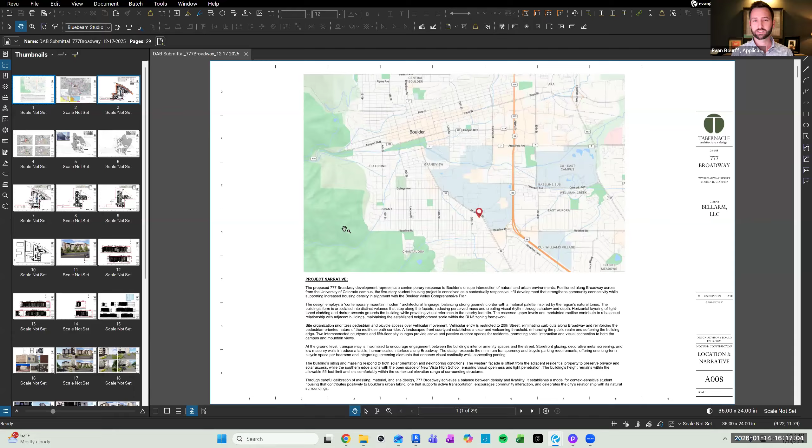Good evening, my name is Evan Bourff, I'm with Tabernacle Architecture and Design, the architect for this project. I appreciate everyone's time and the opportunity to present. I believe everyone's had the opportunity to review the packet and some of the materials, so I won't go word for word here, but what I want to walk through are the design philosophies and some of the site constraints that led us to where we are today.

Located at 777 Broadway, this is the location of the Horizons International Building. It's a student housing specific development, which is important to highlight as we look at the location and the design philosophy of the project. We're looking at 218 beds across 61 units, and the project site is just over 1.25 acres.

The project, located here at item 1, is adjacent to existing multifamily and student housing. But really the most important adjacency for us is being across from the University of Colorado Boulder, highlighting the pedestrian orientation for the project.

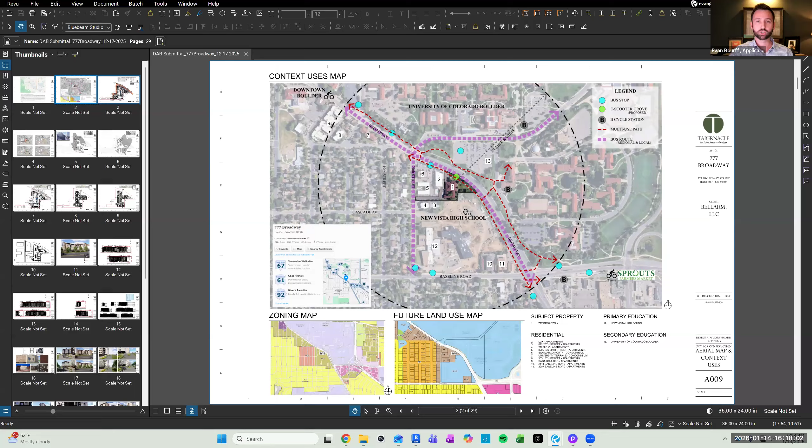As we look at the site plan, I'll get to this next exhibit in just a moment, but wanted to call out some site constraints that are more challenging to see in the 2D diagrams, first and foremost the topography. The site has about a 9.5 or 10-foot grade from our neighbor to the west down to this low point, which will dictate our building height.

In addition, there's current vehicular access located at Broadway as well as 20th Street. With the new proposed design, we're looking at shutting down our access to Broadway and forcing residents to use 20th Street.

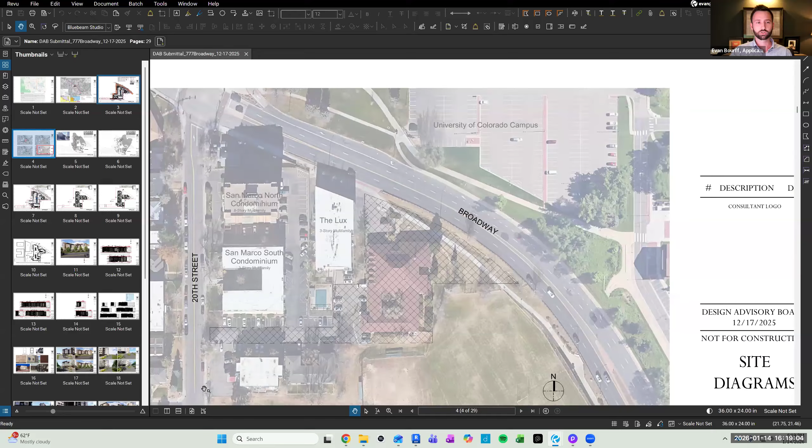Which will allow them to come out to the two signalized locations at Broadway. We're really trying to focus on a pedestrian and student-oriented development. We have a unique location on a multimodal route, Broadway, but also the multi-use path for pedestrian and bike traffic, and we're located near the tunnel that gets residents under Broadway and across the campus.

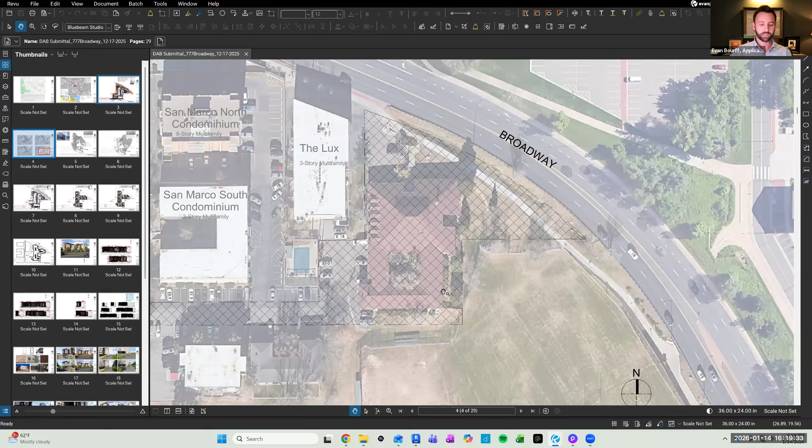So looking at the existing conditions and starting to layer in some of the site constraints that led us to the mass and the building form, we're required to maintain this 25-foot shared utility easement.

Currently that bifurcates the site in two, so we can't build on top of it and have to relocate it. We looked at two options: running it to the location it is now, or along the southern property line adjacent to the New Vista High School site.

We chose this layout because we're seeking to close off the vehicular access and reroute our traffic to 20th Street. The Lux will still have vehicular access at their drive aisle, so their site will not be impacted.

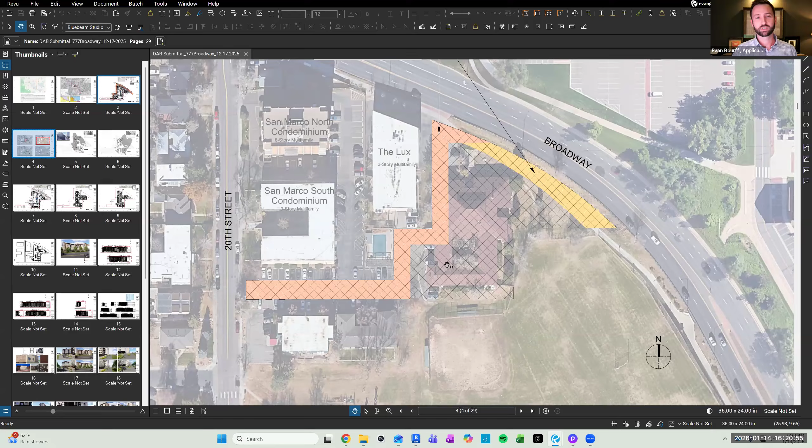But locating the shared utility easement at this location allows us to push our building further east and away from our neighbor at the Lux, which helps create visual separation, but also helps on the shadow analysis and solar access for the Lux, as well as getting our building further down on the low point of the site to bring the perceived building height down.

The other easement shown here in yellow is the multi-use path. So we're starting to layer in additional easements, including the fire apparatus T-turn with the drive aisle removed from Broadway.

We worked with fire, and they'll have to readdress and reroute fire response to 20th Street, so it was important that the fire apparatus was located at that location. As such, you'll see with the building design that egress points and vertical access for fire are located at these locations as well, further helping to define where programs should be situated on site.

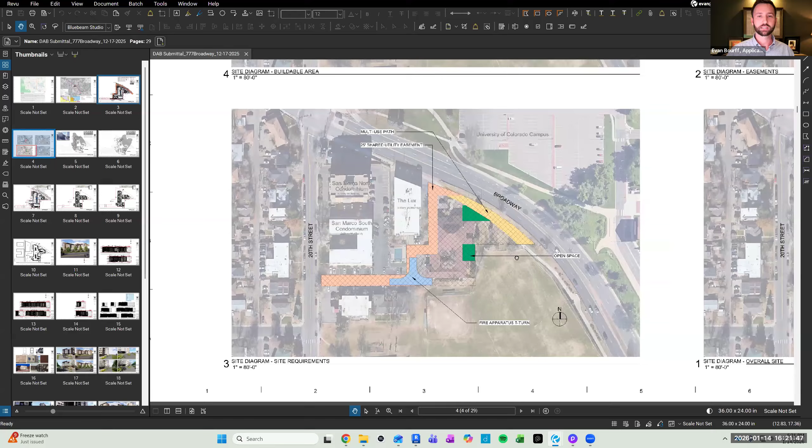Lastly, we have open space layered into the site plan, which gives way to the resulting form and mass that we'll dig into a little more.

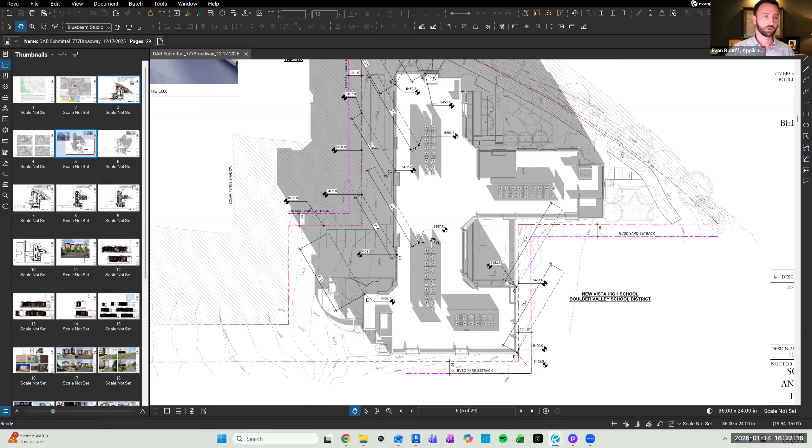With this solar analysis, I'll touch on these briefly. There's one area we'll seek an exemption on, to the east, the open field at New Vista High School, as you may recall from the previous plan. Because of that easement location, we're able to push our building away from the Lux, so we do not need to seek any exceptions with them, and we are not encroaching on the solar fence.

I'm going to cruise through some of the floor plans. Tonight we're really looking forward to getting feedback on about five main criteria within the application, or Appendix B, which I'll reference in just a moment. I think we have one bonus item we wanted feedback on as well. Follow along with me if you have those exhibits pulled up.

The first one I wanted to touch on, sharing not just the 2D plans but some 3D images, is Appendix B, page 4 — if you've got the DAB packet downloaded, that's page 12 of 60 of that document. This one is the landscaping and screening requirement.

Our staff comment was that the criteria is partially satisfied, and we're looking specifically at a decorative metal panel located at the rear of our property.

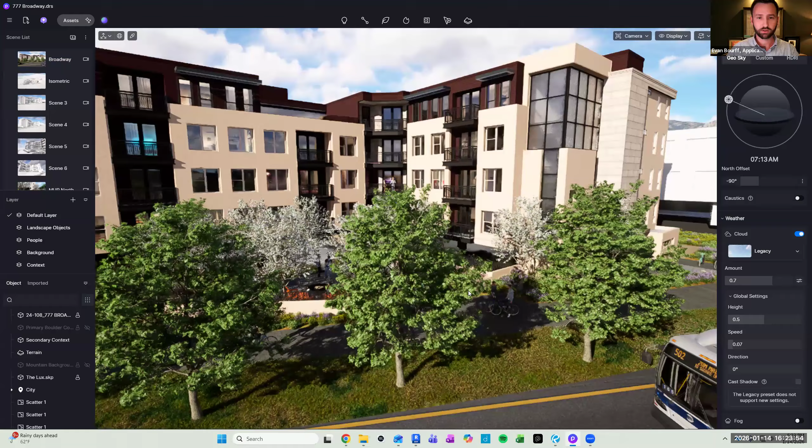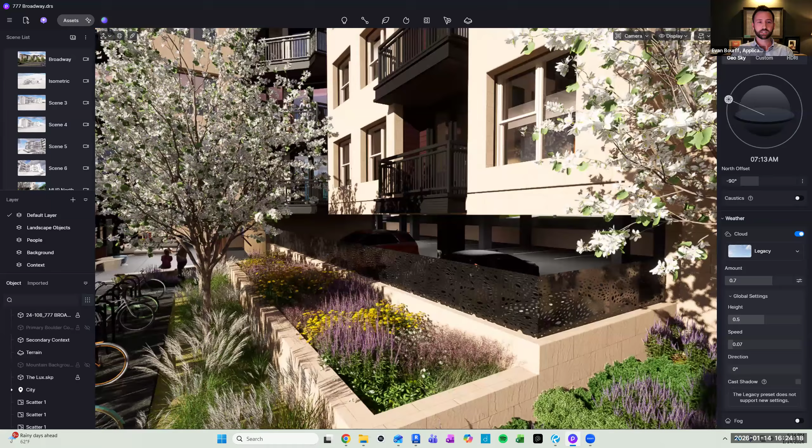As I navigate — hopefully this works okay over Zoom, let me know if I need to slow down — we're employing a knee wall design that meets the required screening height, and in addition we're looking to add a decorative metal panel screening to further enhance the pedestrian experience, both inside and outside the property.

So this comment on Appendix page 4, the landscaping requirement, touches on additional metal screening where we previously were not showing it. This is the previous design, which is what was reviewed to get to today's version.

This knee wall, while it meets the required screening height, staff recommended that we extend the metal panel around this corner, and I think we're in agreement. I think that would look good, so we're going to plan to make those changes.

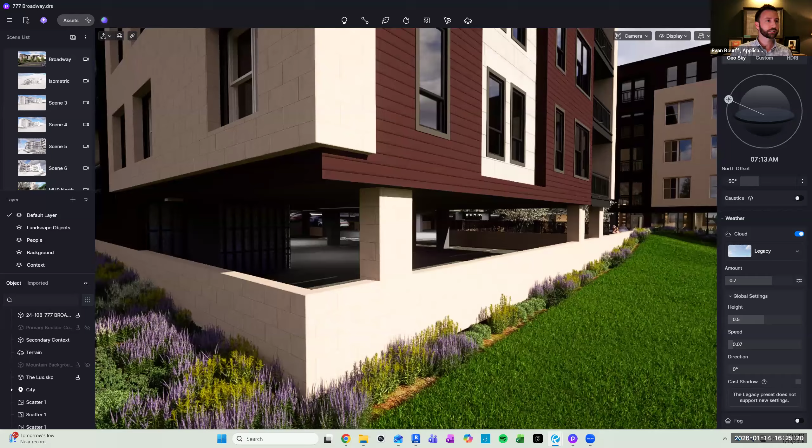The next item, number 2, on appendix page 9, PDF document 17, is related to building massing. Our self-evaluation touches on the building massing, incorporating varied parapet heights. We shift material organization to create distinct forms and massing, trying to keep them relatively simple and distinct. We're also locating rooftop amenity program to further break down the perceived height. We'll look to get some feedback on this criteria as well.

We've been working with Allison and her team at City Staff for the better part of almost a year now, just trying to really fine tune this and be a thoughtful infill development. So we'll look for DAB feedback as it relates to this item. I think specifically as we look around...

To the eastern and southeastern vantage point, again, we're looking at adding rooftop amenity in this location to further help break down that perceived building height.

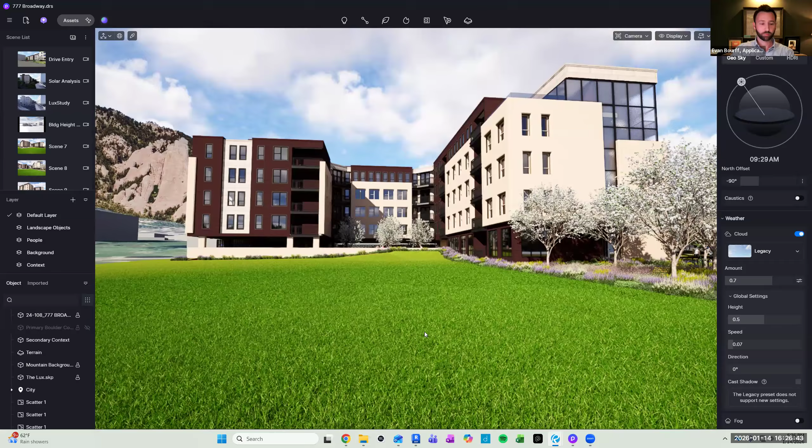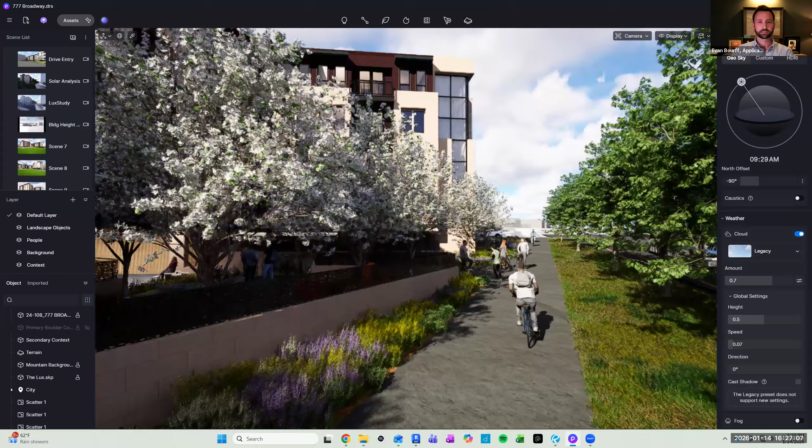The third of 5 would be on page 10. It relates to transparency, specifically around some of the stair towers where we're bringing some of that storefront curtain wall transparency down to the grade. I think there are comments about how we treat this condition at the stair tower location, and I can reference back what that floor plan looks like, as well as this location further up the multi-use path.

Perfect, I'll keep it moving quickly here. I've got my timer self-checking myself, and I failed.

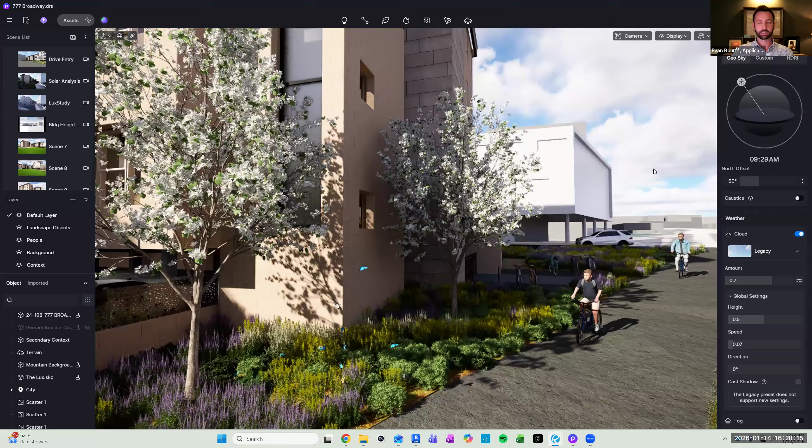So the next item is on simple detailing, on page 11 of the report, Appendix B, page 19 of the PDF. I think this is actually one I got some additional feedback from Allison on prior to submitting. We didn't make those changes quite yet. We really want the DAB feedback before we go and make the changes and then resubmit to staff. We were looking at more simple material moves that have depth to them versus coursing and other details, so I look to get feedback on that. I won't say too much more because I think Allison gave me some good feedback as well, so I'd like to hear the DAB comments.

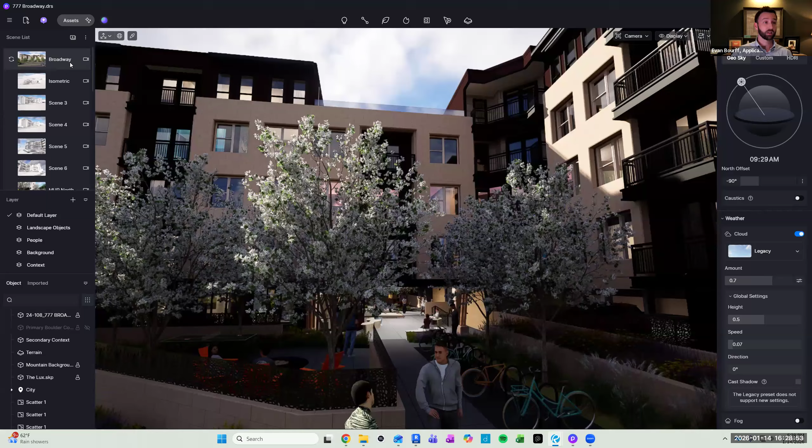Number 5 is building materials, on page 14. We really worked with staff on reducing our building materials and the color palette we use, trying to simplify that best we can. You can see here on our materials board, it's 3 primary materials, each with 1 assigned color, where before, previous versions had maybe 2 colors per material type. So we really reduced that down to help soften the facade, while still being contextually appropriate in that color palette. So I look forward to comments on that item.

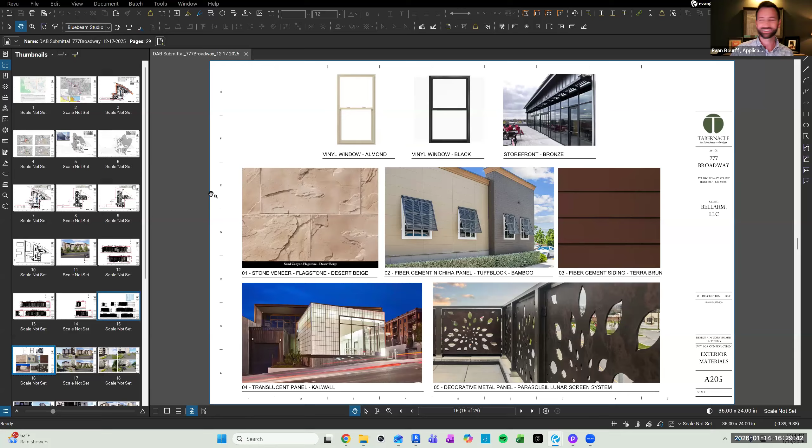And then the last one, which is kind of a bonus item, on page 16. This relates to the building facade exceeding 120 feet in length. In my self-evaluation, I say that it does not apply, but we got criteria satisfied, so I wanted to touch base with Allison on that as well. We use negative space to our advantage here at the courtyard. We're looking to not have an imposing facade along Broadway, but really use negative space to our advantage to help that building massing break down, as well as invite pedestrians and landscape nature into that front facade.

I can stop there, I heard the beep again. Great, thank you for that.

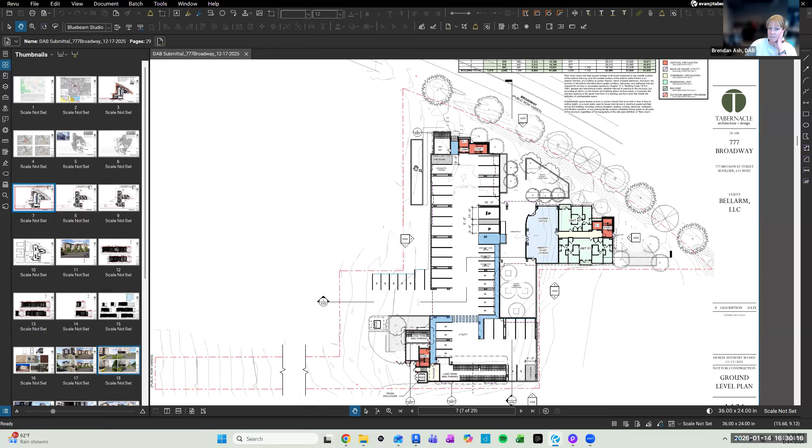Are there any questions for Evan before we continue?

I had a question. You mentioned you guys are going for a height variance. Can you explain what that is and what that entails? Sure, we are seeking the full 55-foot allowance for the height variance, 5 floors. This structure is 4 stories over 1 level of podium. Our parking is located beneath that podium, as well as some leasing and amenity space, bike parking, and we do locate 2 units on that ground level. So is this zone not allowing 55 feet, or what's the variance you're asking for? It does allow it, but we're seeking that full allowance of 55 feet.

I'm confused, but I can step in if it's helpful. Yeah, please explain. I'm just asking what's by right and what's not. So we do have by-right heights. I believe the by-right height in this zone is 38 feet, and our charter does allow for up to 55 feet, but it has to be through a site review. So the by-right height is usually about 35 or 38, I don't remember the exact zone. So the height modification is to grant height up to 55 feet from 38.

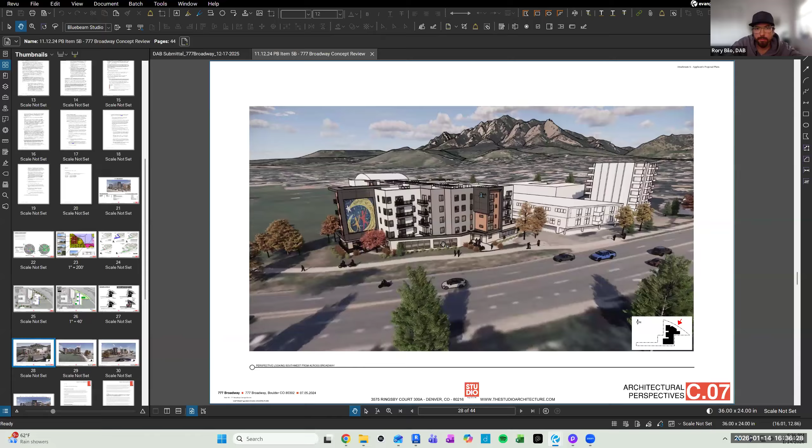Brendan, let me ask you a question. I'm on your website here, Evan, and I'm looking at what's clearly an older rendering of this project. I'd encourage anyone from DAB who has internet to go jump on his website just to see it. I'm assuming this is what was presented to City Council when it was referred. No, and that's what I was going to make a point of, if I'm able to reshare here. I'm just curious how much in our packet has already changed since what you shared with City Council. I wasn't part of the team that submitted the initial concept plan, I came in after concept and before site review. So what I'm sharing here was the concept design that was then referred to you guys. So it's a completely different building. Correct. I just think that's important to understand for the DAB folks here, that in some ways City Council's commentary and referral is for this building, for whatever that's worth.

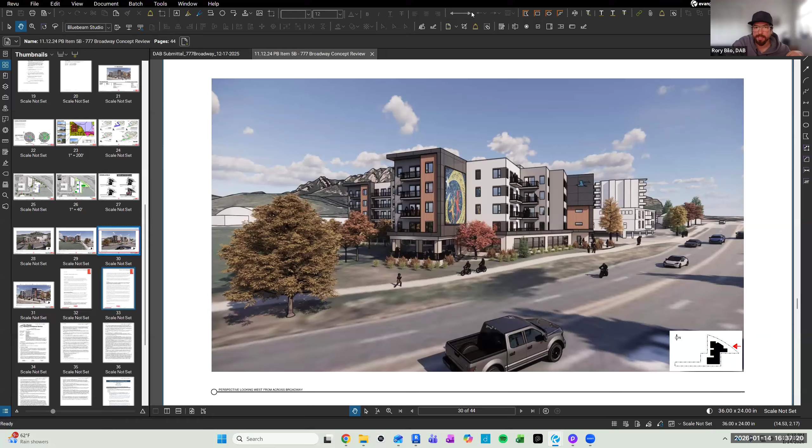Yeah, I think that's good to understand. Okay, good. Because I was thinking maybe it was the one on your website and that we were on round version 2.3 or whatever you'd call it. So that's good clarity. Thank you. Thank you.

Okay, great. We can jump into the first discussion item. We're not going exactly in order because in our criteria it starts with the landscape screening and the parking, but we thought we'd jump to building design first, and I think it will begin the discussion.

I'd like to begin with an overall design view, and then I felt like the landscape screening was a little more specific, so we could narrow that down next. The first is about the variety of forms and the general massing of this project, building forms and roof lines, parapet heights, specifically looking at the roof deck, which isn't really clear as to how that's programmed. It's less prominent than some of the ground floor amenity and outdoor space. But that was one item we were asked to have a conversation about.

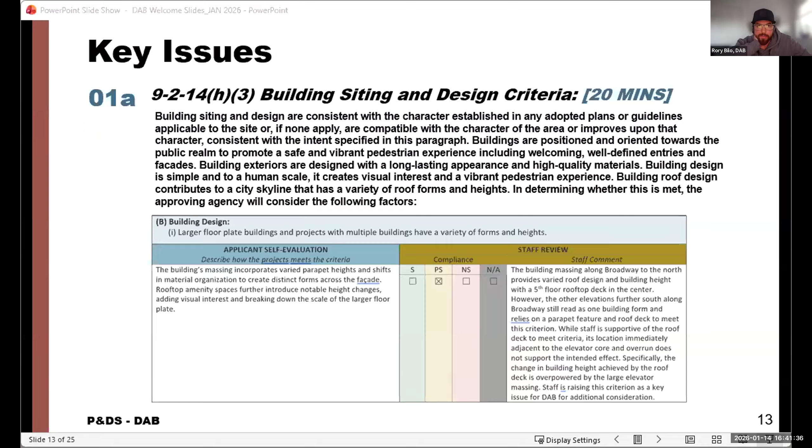In my understanding, allowing for relief from the 38-foot height limit is to create diversity and interest. It's not to say, here's your new top of plane, extrude the entire footprint up to 55, and strike it with a wire cutter. To me it's saying everyone's always going to go up to the 38-foot height limit, stuffing as much of whatever product they're trying to sell into that 38-foot height limit, but that's boring, just a big wall, a block of cheese of a building. So let's give developers the ability to add interest in order to exceed that 38 up to a maximum, since we've got beautiful mountain views, up to 55.

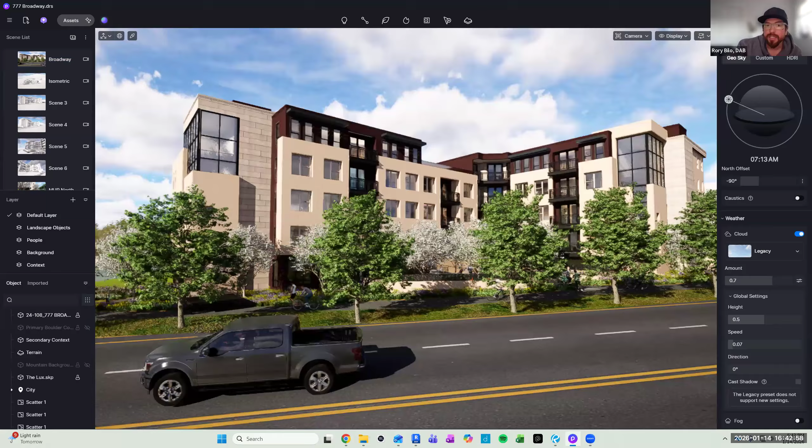So I think initially my knee-jerk reaction is you guys took your cake and ate it too. You took the 55 feet not as an opportunity to embellish architecture, but to just continue stamping units all the way up to that datum. If there was more of a crescendo happening, or features on the extremities that warranted saying 'hey, 55 feet would be incredible because it's creating this distinctive tower-like mass,' or something that creates a real entry feature on the south corner, almost like an arrival beacon for the city of Boulder, or particularly the student neighborhoods of Boulder.

That's where I think I'm in support personally of height modifications, not just extruding buildings until you get there. So that's one. Two, I think the other criteria is to break this building down into multiple forms, which I think you have some very good base moves, particularly in plan.

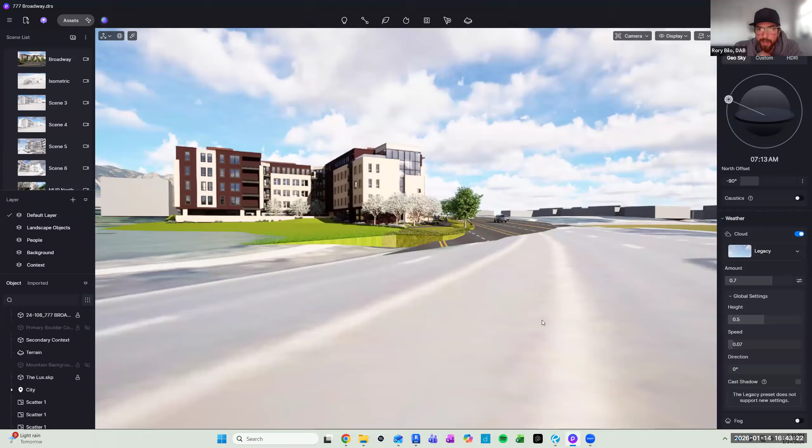And I know there's a lot of staff commentary talking about the facade along Broadway, particularly the south side of it. And I realize we have this roof deck that's sort of at the end of a hallway, so how useful is it? They're concerned about how it's overshadowed by the stair tower adjacent.

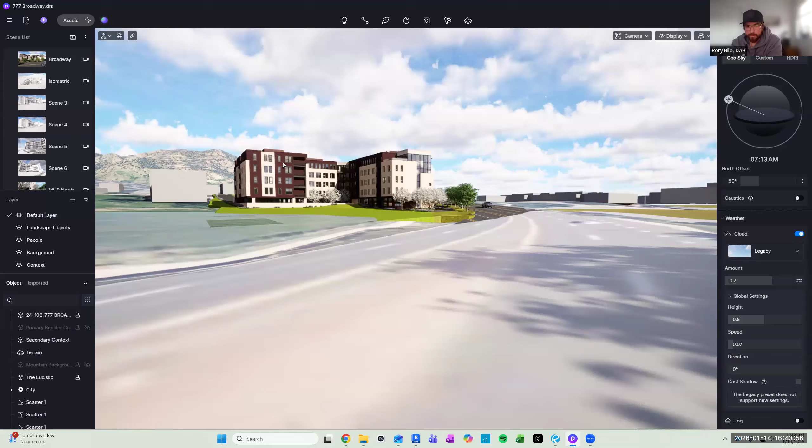But even at this level, if you squint at this and you're driving by at 40 miles an hour, that looks like a 55-foot tall block. It's not looking like there are features that were allowed to break the 38-foot datum to create architectural interest.

If you swing back, though, Evan, to the east facade, that's what I'm calling the money shot of the project. I think there's a couple of moves that you've already started with mass and plan that I personally would encourage further embellishment on, to help with one of the criteria, which is to create distinctive buildings.

So if you're going to be this tall, they don't want anything over 120 feet. Sure, you could probably show me on a line how you're justifying that, that's fine. But graphically, right now, you're almost there. You have this right side building, this left side building. You literally have an open court or breezeway on the ground level.

And then you reinforce that on the upper level by having the roof deck hyphen. So you've already started with the sandwich-bread of negative space, top and bottom, but then you've completely negated all that effort by taking that stone facade and using it as a bridging link. I would actually encourage the void nature, as you've described it, to continue ripping these into the appearance of two distinct buildings. I think that's more in keeping with the spirit of trying to break up 120-foot-long building facades into more digestible building forms.

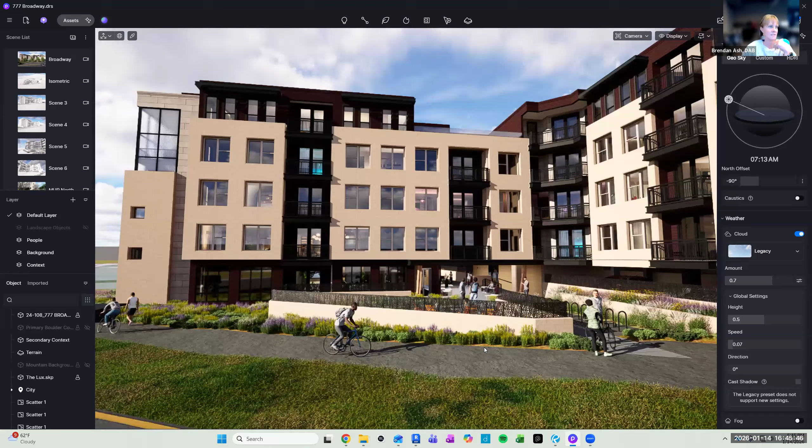All right, Brendan, how much time do we each get? Are you clocking? I didn't hear my buzzer go off. We have another 12 minutes to get through three of the design criteria. Oh hey, you put me in line first, so that was an advantage. That was a great start — everybody else gets 30 seconds. Go, great. I think I had Harriet next. I'm okay to go a little later. I think Stephen wanted to jump in. Let's get Stephen next. I could jump in if you want me to. Please.

So when I looked at this project, I must say I was like, oh Jesus. One of the contexts of Boulder that's going on right now, there's a new hotel built by the university, and I like to call it the Darth Vader Hotel. You've seen it, and it's across from the Moxy Hotel, which was also just built. Moxy was built under city rules; the other hotel was built because they have an exemption for the university. And if anyone's had their ear to the pavement, people in Boulder are not happy about that hotel — it's looming over the city. I think it's the Limelight, 7 or 8 stories tall. It's black and white.

So I think you should really look at the Moxy and the Limelight in context of each other, because there's a lot of things that the Moxy gets right that you could look at for this building. There's a lot of things that the Limelight are doing that's just maximizing its build out.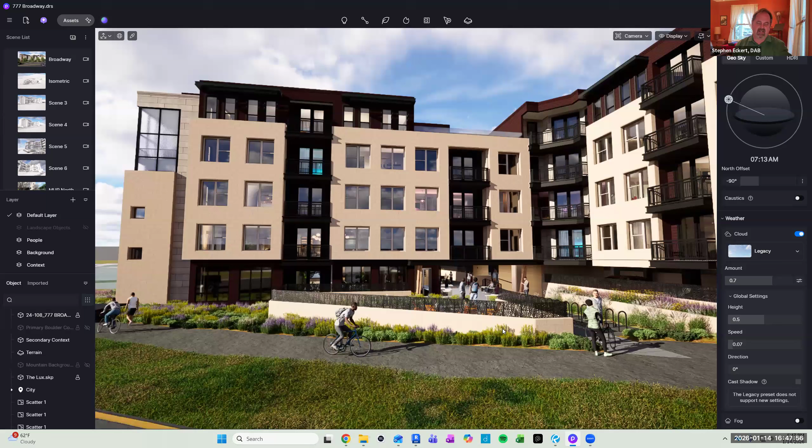But I'm interested as to why you put the circulation towers on either end of the project, especially the one there on the left, which is the prime real estate of the whole thing. It's crazy to me that you and the owner didn't have a conversation about not maximizing the units inside with the best views, the southern exposure. We're putting the circulation there. It doesn't make sense to me. And it's also the highest part of the building, right?

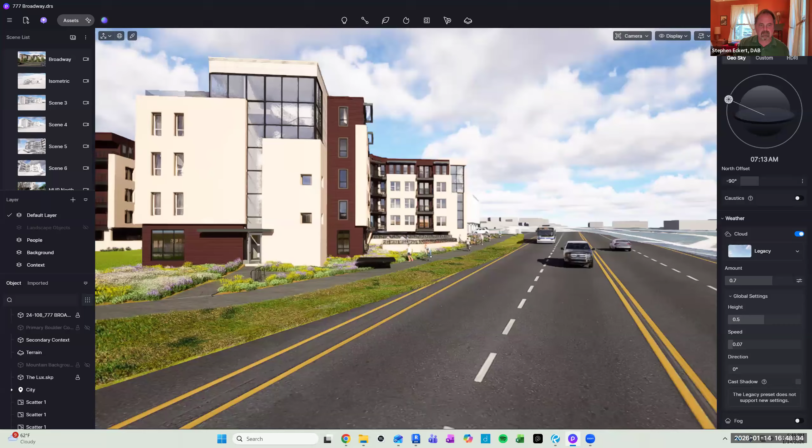So if you didn't have circulation there, if you swing around where you're looking, keep going that way, keep turning it. Just imagine you can hold it right there. Imagine taking that stair tower out of there, right? And we had the 3 or 4 story mass on the lower right, and then it steps up, and the stair tower is tucked on the western side, right? You're going to, just by definition, break up that mass because you're going to step up away from Broadway.

You know what Rory was calling the money shot? Yeah, that's the front facade, but that's not how you're experiencing this building. Yes, the students are going to experience it walking, but everyone else in Boulder, like Rory said, is driving down this street, and this is what they're seeing. And I can tell you right now that everyone's not going to be happy. That's what the city council is responding to.

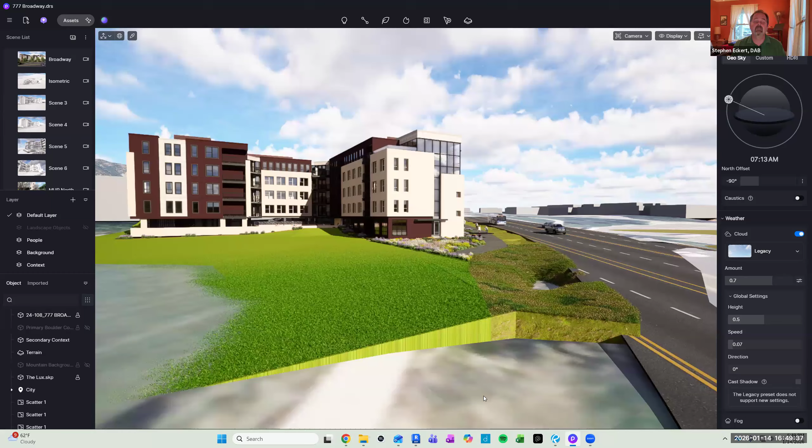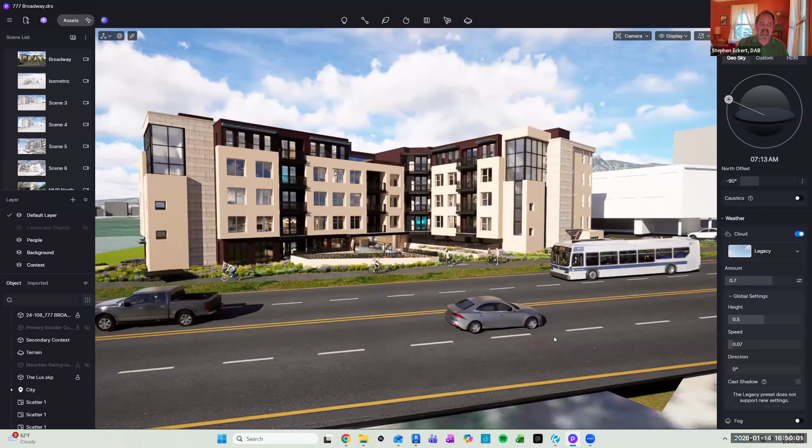It's because we're going from a ball field to 5 stories, 55 feet, and then we step down to the building to the north, which is much lower. So I wouldn't, if I was in city council, support a height variance here because I don't see the hardship, and I don't see that you're trying to layer the space up. The highest part, almost in this scenario, needs to be in the middle of the building, so you could kind of step up and then step back down.

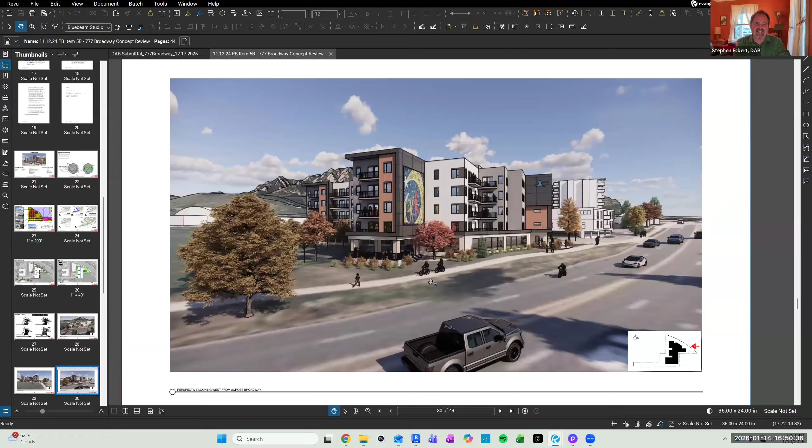So it's funny, the picture that you showed before, your original design. It's always amazing to me how, I don't know who gets into these designs and starts critiquing them. We don't get to see it at that level, which is a big bummer, because it's actually the moves you're doing in that first go around that are better than this solution. And we always see that. I'm always like, that happened on the last project we looked at, Frasier Meadows. I'm like, oh wow, the original one was actually better.

So this is folding, right? That's like folding. And then look at that, you don't have the stair tower on the corner, right? You've got people living there, and you've got the windows on the corner, and that makes a lot more sense to me. And it feels a little bit more like a gateway. You got a big sweeping form from the top down to the bottom.

Anyways, I think you know this, and I think it is what it is. I think having a frank discussion with the owner, your developer, like, we got to get this through, and the city's not going to go for this. So what do we got to do? Well, I'll just leave it at that.

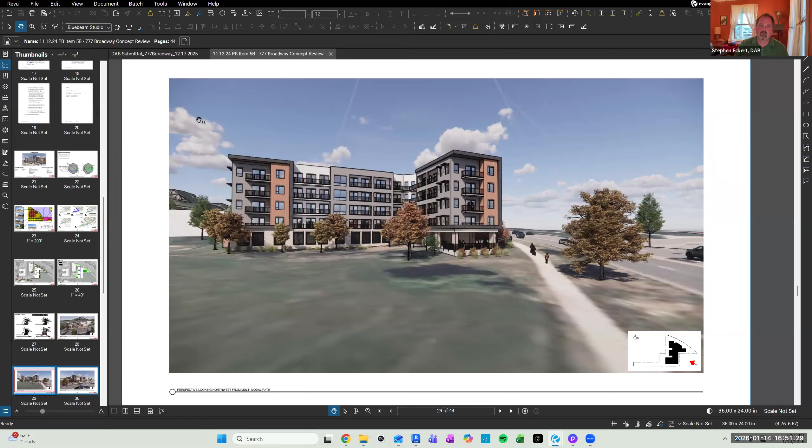Okay. Matthew or Harriet?

I can build off what Stephen was saying, and I just had a few things to add because I think both Rory and Stephen did a really good job here. When it kind of came to this, when I was looking at it, it felt like you forgot about the corners, similar to what Stephen was saying. It was like, oh, we need cores, oh, we'll kind of put them here. That's what I get when I look at this in terms of the impression, and those seem to be the best parts, the best apartments. So I'm not sure why they're used for circulation.

And I was looking at this, and I couldn't decide whether I thought this looked all right because of the trees or whether it was actually the building.

And then when we switched around to the other one, I'm like, oh, it's actually the landscaping that's really helped to soften that. And you don't have that along the other side. So it does look more blocky and chunky and just big overall. I think that's all I had to add, because Stephen and Rory kind of covered it. But for me, the corners were the biggest misses on this one.

Over to you, Matthew. Yeah, I'll be brief. I wish I could give a little more variety, but I feel like there's a consensus here.

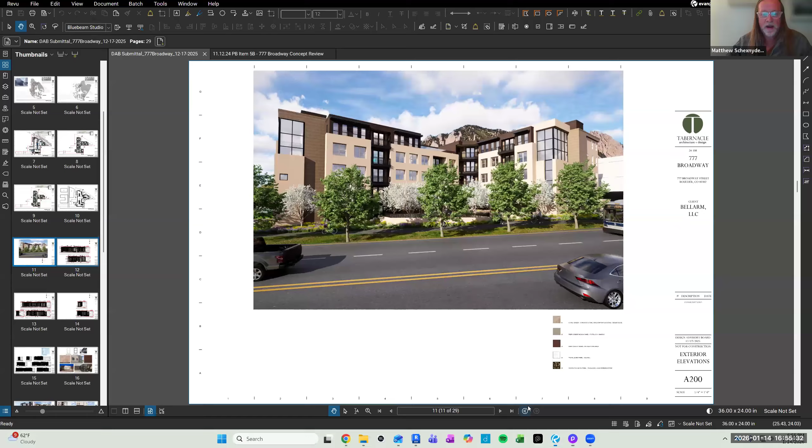And I think the overexuberance is best illustrated in the presentation, in sheet A220, the 3D views. It's just the white box renderings, but in my mind that view speaks volumes about the difference in scale along those three buildings there, whereas the older building furthest to the north is a much older vintage.

It's very much oversized and out of scale with current development. And then that building in the middle, which is ten years older or more, is sort of the scale we're working down to, which I feel is more appropriate for what this area is zoned for. Yeah, I think that's it for now.

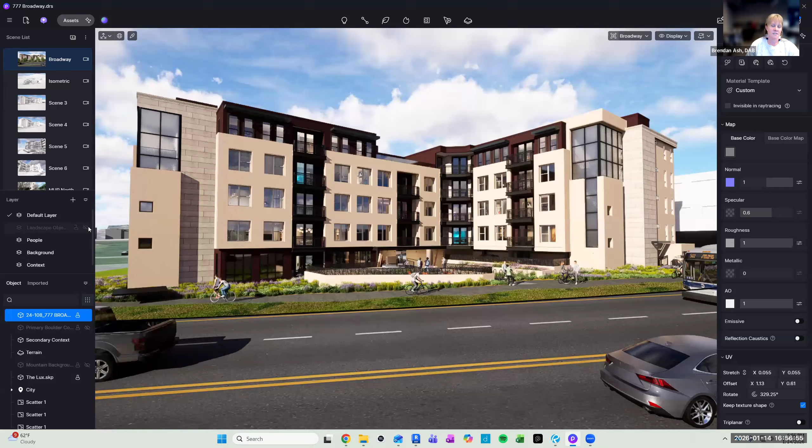Okay, and then my final review, I would agree, and in summary, I would agree on the missed opportunities, while I appreciate the form of this building creating a lot of opportunity, especially for some south-facing daylight and additional glazing. It gives a lot of visual interest, a lot of facade, and opportunities for programming to have it in the footprint and shape that it's in.

I would say that especially in this view, the transition of the programming going from the first level of units up to the top floor doesn't quite bother me as much. I think that the added forms — and we are going way over time on this design conversation — but I think the added massing and the relief provided in this design really breaks up the programming successfully, in my opinion, along with the parapet height.

I'm usually the one that complains about uniform parapet height making me crazy, but in this case the contrasting material colors, the added awning roofs, and the variety of window sizes and scale break it up enough that the stacking floor plates doesn't visually look like it's doing what it is doing.

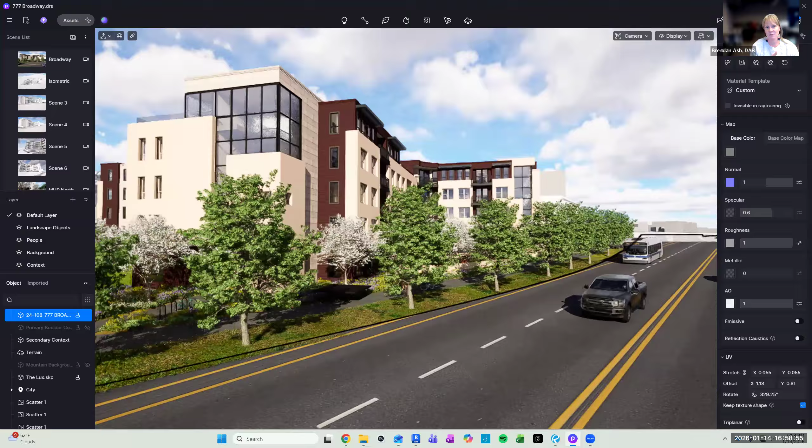I think going back to that south elevation, I would agree with Harriet that because it's going to be so close to the property lines, there's not an opportunity for the landscaping and the softening with trees like you have on the other elevations.

And I would recommend that that gets investigated and studied a little bit further.

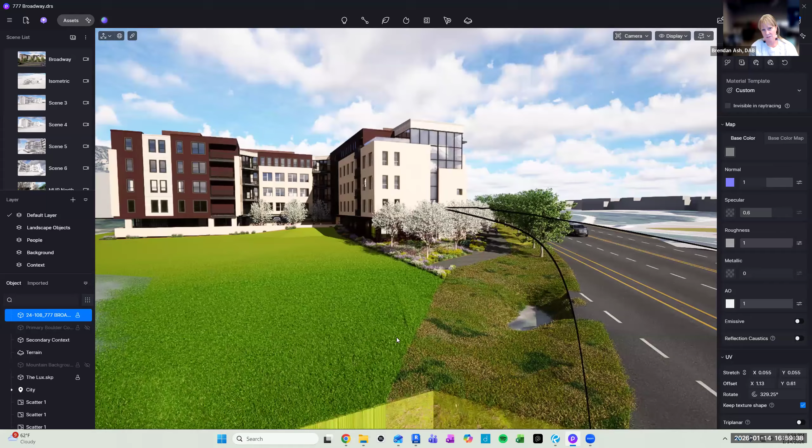This one also doesn't have the same language of transparency and windows as it does on the east elevation. So I would suggest bringing some of that language around to break up the facade a little bit more, so that the south elevation has additional detailing and massing changes like the other elevations have. For example, the south elevation has a white band running vertically, which is different - the others are more like massed cubes reading a little more horizontally, and that language doesn't quite meet the rest of the language of the white cubes or bands that give that kind of relief.

So in trying to sum this up, I think we are in agreement that because this is right adjacent to the brand new New Vista High School and a giant field, while you're driving into the CU campus, it is prominent and it is one of the first buildings that you're going to see.

So I think additional investigation on the design on the ends of these buildings, including circulation. I know it's difficult programmatically to try and relocate these towers that are acting structurally for egress and all these things, but in order to make them read a little bit less like just big concrete bunker stair towers, and also just bring some of the language around from the other elevations.

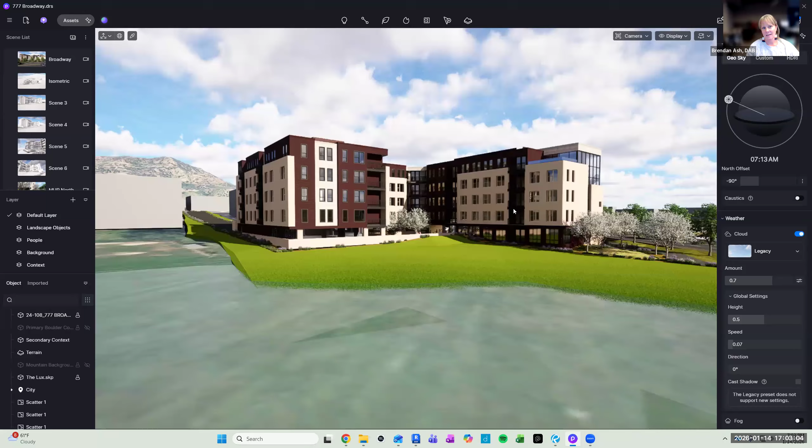And I agree with Matthew that it's not great to use as precedent some of these other really tall buildings in that area, particularly on the CU campus with the Limelight, and that other massive, much older apartment building just to the north of it. There's also another one right across the street from the library, east of Broadway on Arapahoe, that was kind of a whoopsie - I don't really know how the height of these got through. Obviously it was way before our time, but there are a couple of apartment buildings in Boulder that I think should not set precedent for height. In fact, they should be a cautionary exhibit.

Anybody want to add anything else to that summary? Yeah, I just wanted to add real quick.

As you're looking at it right here, it seems that you guys are attempting to break up the mass and the height along Broadway by making it kind of fussy. I mean, I keep wanting this building to just be a lot simpler. In fact, as you spun around before to the mountainside, even though those were bigger masses, they were more repetitive and simple. And again, your original design was simpler. We also tend to see that people make things fussy and busy, but that doesn't necessarily translate into fixing the issue. So think about that.

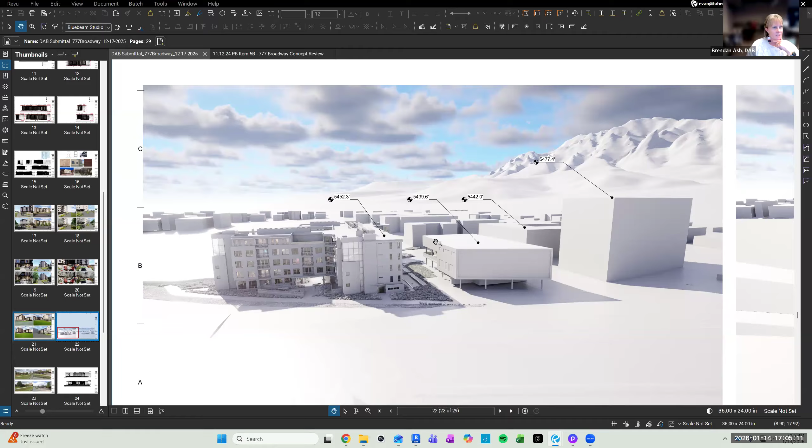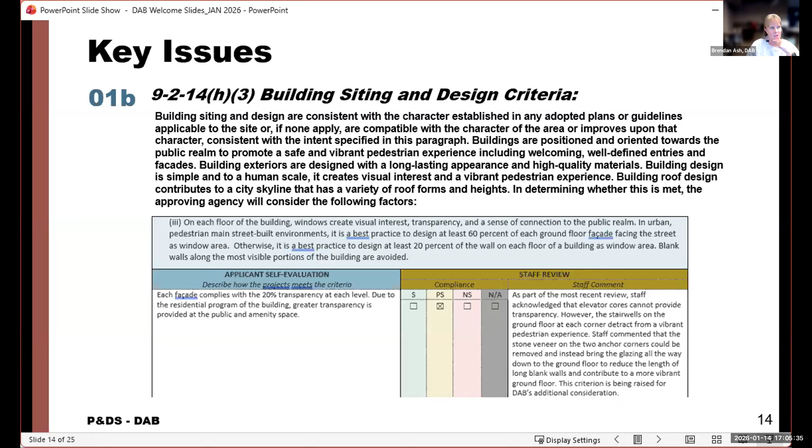Okay, now this kind of piggybacks, and I think maybe we can go through this conversation pretty quickly. I'd like to, if it's okay, combine this transparency conversation that we had, which talks about the glazing on the corners - something we've already touched on a little bit - and in conjunction with that, talk about the material palette.

One quick question: is the corner glazing on the stair towers curtain wall, or is it the big glass panels shown in the model? I thought you were saying curtain wall, but that's not what's rendered. It's rendered like a storefront system, opaque and semi-translucent, but we'd look for curtain wall or equal. That's a huge difference in terms of the human scale of the panels, because curtain wall panels are not that big. I just wanted to know which was which.

Amelia, am I moving on to the right next design criteria? Yeah, it's time to talk about transparency. In the interest of time, let's talk about transparency and materials. So if you want to kick us off, Rory. We have the 20% transparency issue, and can you also flash to the material criteria, more simplified material discussion.

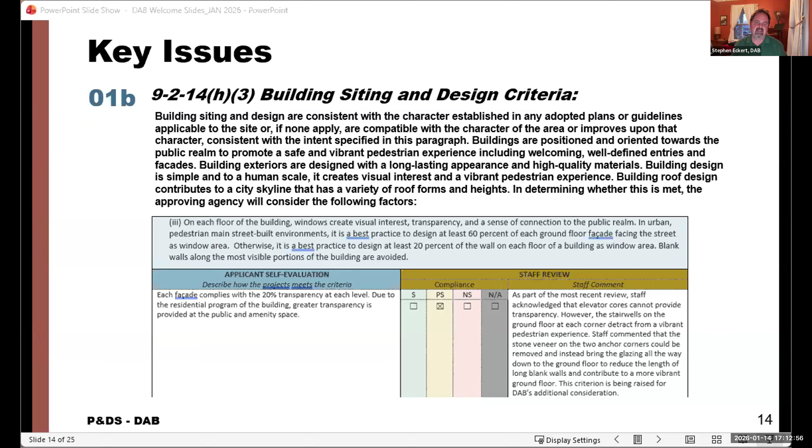The fiber cement siding, definitely look at the colors. I am serious about the reaction to the Limelight Hotel, and there's that black and white thing going on - maybe a lighter color could help with that.

Kalani's going to laugh because she knows I'm going to talk about the vinyl windows - that's not okay. I just don't understand how a developer or owner could even be pondering vinyl windows on a building like this. You can't use black vinyl in Colorado - it will last about 5 to 8 years, the sun just hammers it, it'll turn to chalk. I like to call them PVC windows because that's what they are, made out of PVC. They're terrible environmentally, and thermally they move in Colorado - we get 40, 50 degree temperature swings. So they look great in the test, but they're terrible thermally. They leak, and most owners I know end up replacing them in 10 years. Now if they're willing to do that to save money now, great, but I would go with fiberglass as the next step up, or better yet aluminum clad - but obviously that's a cost issue. If you're spending the money on the storefront and Kalwall and some other features, definitely look at the vinyl windows, because they will be a maintenance problem, especially with students. I can tell you that right now. I know this is probably out of the purview, but I highly recommend not doing vinyl windows.

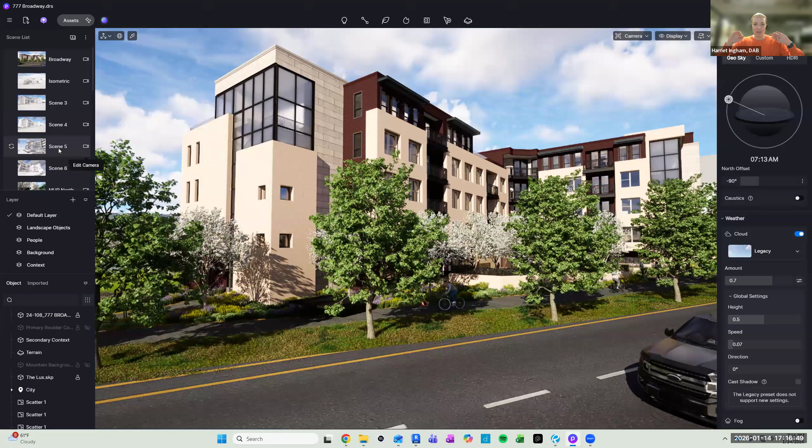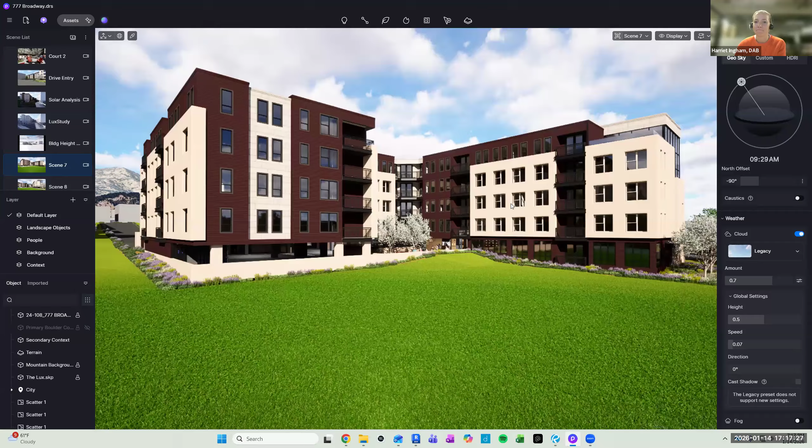Matthew. Yeah, I don't have too much to add. I feel like I concur with most of that.

I think where the fenestration, where the rhythm, if I can stick strictly to that, I think where it kind of falls apart again is at the two prominent end caps of the building. The patterning of the residential windows has a natural rhythm, and I think the cladding scheme is working with that. When you get to what I guess we're calling the Kalwall sections, I think it all just sort of falls apart. And I think that's part of why these end caps, having the stairwells just tacked onto the end, that's always going to be hard to deal with anyway. It really interrupts the rhythm of what you're doing with the building.

So it looks like a residential building in the middle with then kind of a whole different scheme of vertical circulation tacked onto the end. So, hopefully to be constructive about it, I would look for a way to integrate rather than differentiate those end caps. That Kalwall is not the right proportion in my mind to achieve the criteria, which is talking about calming things down and integrating better. So I would look at finding a way to absorb them into the overall rhythm that you've got, which is successful in the main program areas, which is a little bit easier to grid out because it's a repeating program. So I hope that's helpful.

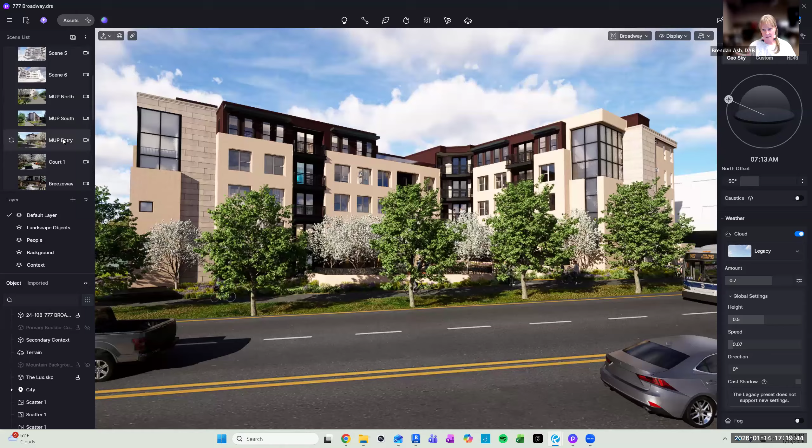Okay, I know that I said that I wanted to talk about the specific parking screening later, but we haven't really touched on the fact that this massive building is sort of floating on air, having that transparency through the parking area on all the levels.

I am not sure that having the partial height screen wall carries the language of the massing and of the building to the ground and grounds it like I'd like to see. I'd almost like to see some additional translation of the vertical mullions that we're seeing in some of the elements above, making—instead of having this horizontal screen wall on top of a knee wall to screen the parking—I'd like to see some vertical elements with that screen wall maybe as infill, rather than having just the kind of eyebrow of this building floating above.

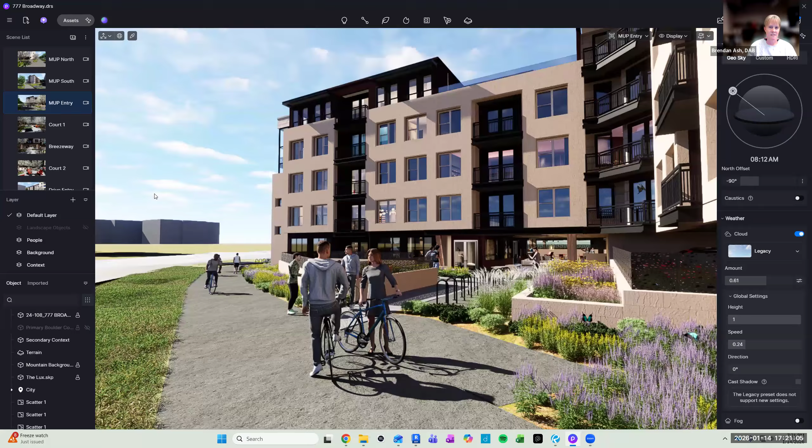Where you have the amenity space and the leasing office on this elevation, that building feels really grounded to me. And then when you get over to the parking, with the building floating above and looking at the tops of cars, it's just not visually very appealing to me. I feel like some of that massing needs to be brought down. While I like the materiality of that screen wall, I would just like to see that building not floating on top in those couple of areas.

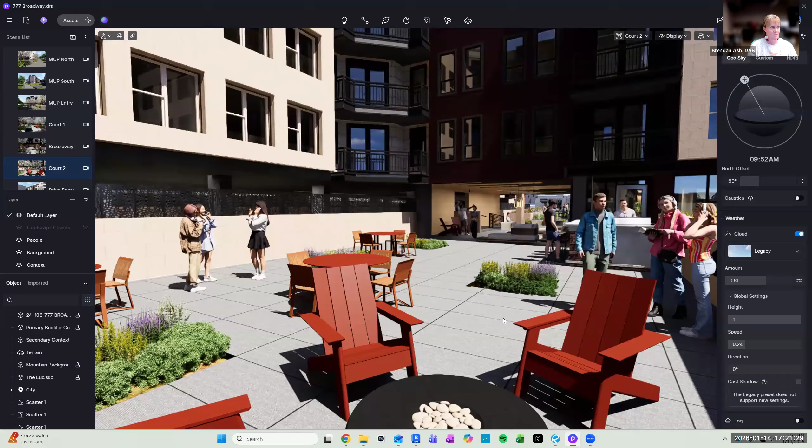Going into the materials very quickly, I am concerned about having too many different materials for the windows especially. If we have a dark bronze storefront system, an aluminum storefront system, and then we're going into the Kalwall with vinyl windows, I would agree that the vinyl windows don't match the language of the storefront. So the windows need to have the same language—there's so many of them, and there needs to be a common materiality language for the windows. In my mind, I would rather see that be metal clad, something that speaks to the storefront a little bit better and integrates it better.

That black vinyl is not going to look like that for very long. And I think with the Kalwall, we've introduced an additional language of window system, and I think our objective should be more about integrating and using the language we already have in this building instead of differentiating these end caps and introducing this translucent Kalwall element, which now is getting a little bit fussier.

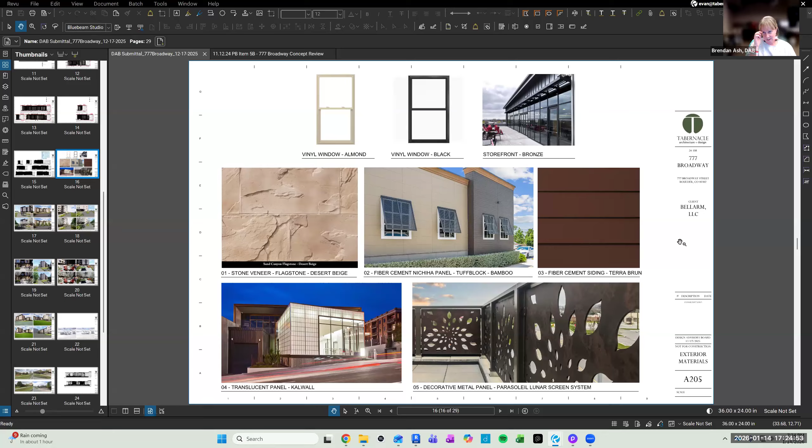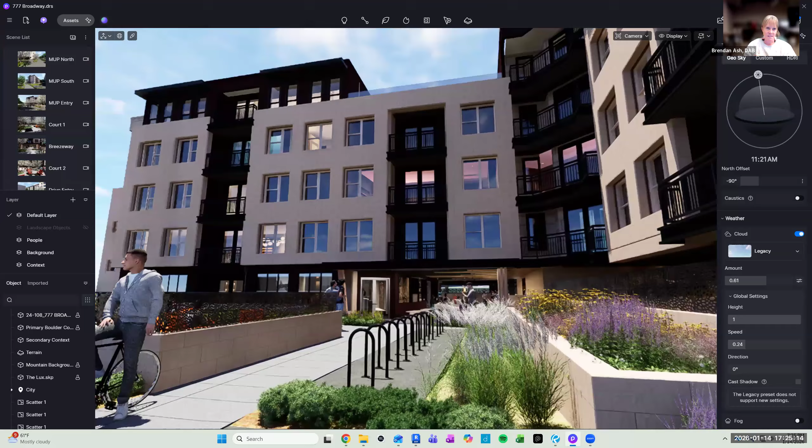A suggestion was made for the transparency to maybe vertically translate or follow some of the amenity spaces or circulation spaces. There's an opportunity to make these distinct masses with additional glazing and detailing, instead of bridging materials that span from mass to mass. I think this will also make the underpass from the north courtyard into the south courtyard feel less oppressive and a little bit lighter. We have so much floating building happening that translating these features vertically into the transparent parts of the first floor could help with overall massing and grounding of the building.

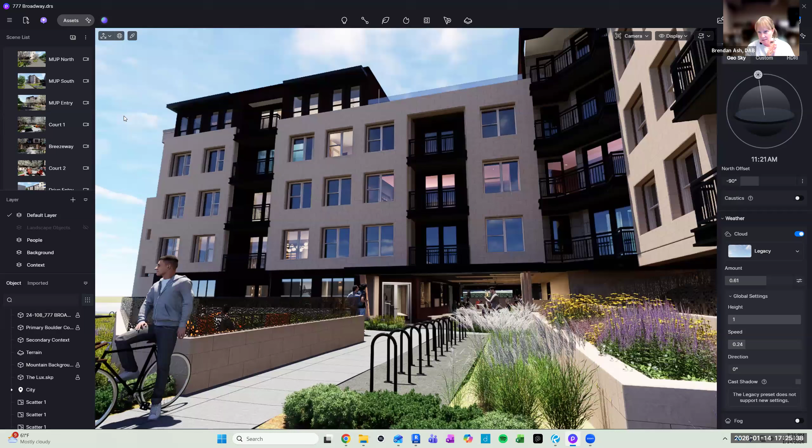Am I missing something? Do you have any additional conclusions?

No, okay. And then I think the final element would be the screening that I've kind of opened up the conversation for.

We have two more criteria in there, but you covered the height modification, which was partially covered at the beginning, but we still want to go over that particular one. So I want to talk about the height modification last, and then go to the first site design criteria with the screening. Is that right?

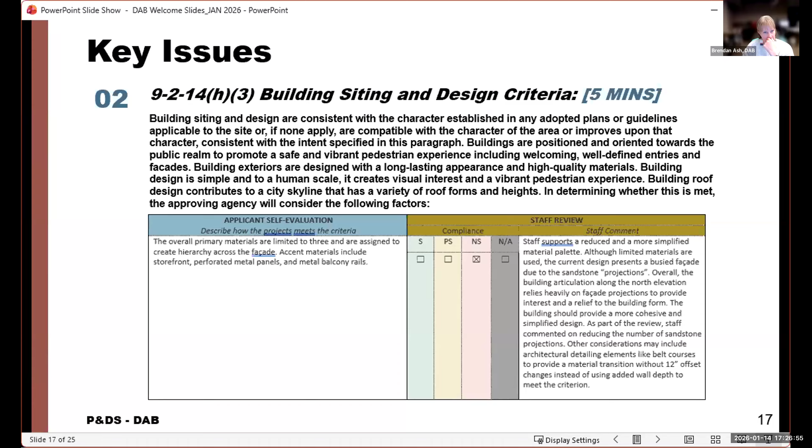I have the right slide up, Brendan. Does that look right to you? Let's see, that's the one we were just on. Yeah, I think we've covered that.

Okay, building design, building materials. And then site design. Sorry Kalani, am I missing something here? No, this is the screening one you were looking for? Yes, this is the one.

Okay, so this was again a conversation about the metal panel needing to be carried to the south, so the screening has additional screening on it between New Vista High School and parking. So Rory, I don't know if you have thoughts on that.

Yeah, I'm trying to pull up the site plan if he has it. Have your 3D view available by chance in that area? Yeah.

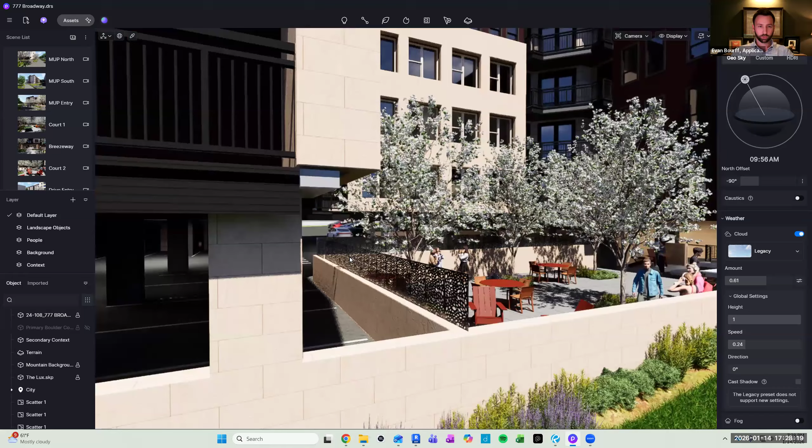I tried to touch on this at the beginning. Following this comment, our design team is already in alignment, incorporating pulling this metal panel that runs through the courtyard, which really separates the pedestrian areas from the parking. But to be consistent, we'll pull it across this knee wall as well and add to the design.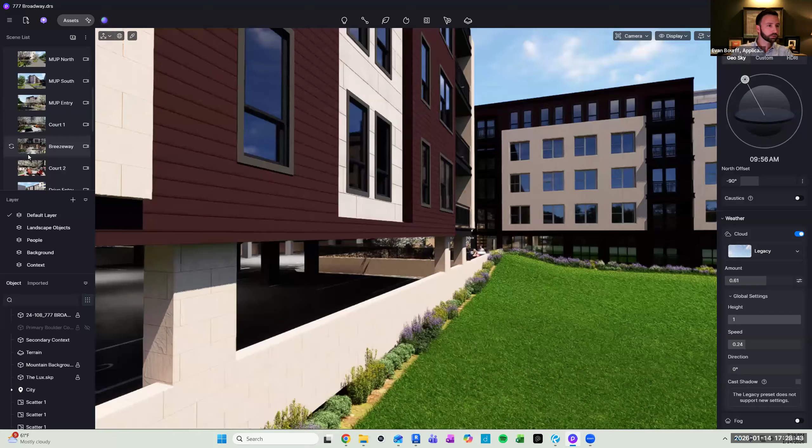I'm trying to figure out exactly where your transformer is. Is it showing in this model? I see your trash enclosure. Yeah, so this is coming from 20th Street down by the flag lot. We have trash located in two surrounds, trash and recycling, and then we have the transformer located with landscape screening.

I always laugh, this should be an Xcel problem, not the architect's problem. Yeah, if Xcel could say show us where we can put it, that would be great, but there's a lot of criteria and access requirements and fire separation. The other one, there's one when you first come in on Highway 36, off to the east, and clearly someone didn't think about it because right next to a glass wall there's an 8 foot tall CMU block wall to protect it from a blast scenario, right on the front facade.

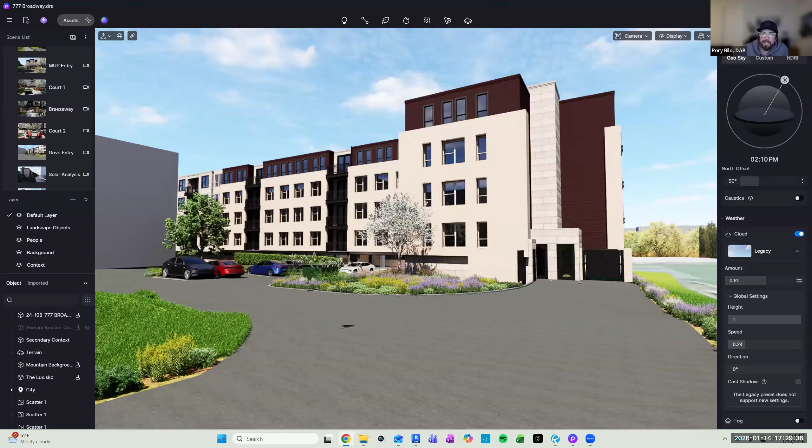I guess I'm not seeing anything here to provide any comment on. I think the additional screening for the parking areas makes a lot of sense to me, particularly on the heels of what Brendan was describing.

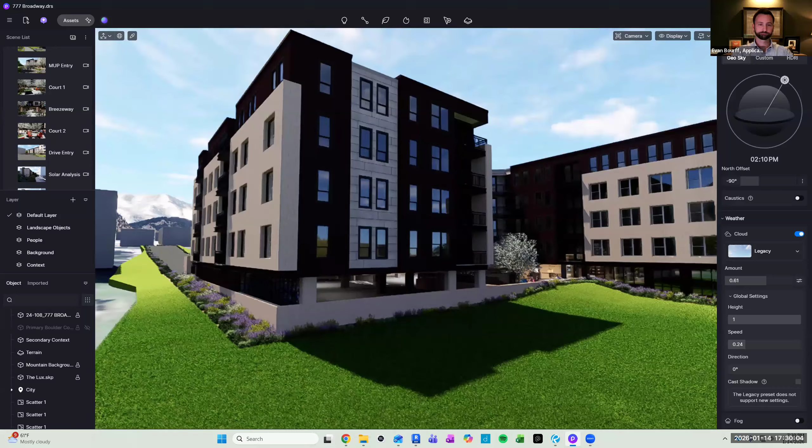As far as the transformer, I appreciate that it's on this facade of the building. It's buried down the flag lot, and the ability to screen it outside of landscaping is quite challenging, to preserve access and fire separation and things. So I don't think I have any additional comments or input.

I agree. I think that doing the panels, the metal panels will help a lot, and I think that's a good move. And yeah, I don't have any additional to add.

I agree. I concur as well. I feel like this is sort of a low-hanging fruit type of solution, considering some of the other things we spoke about. So yeah, I concur with the previous comments, actually.

Does anybody have any further discussion about the kind of floating over, like maybe making that the panels read more, not quite so horizontally, so that the building's not looking like it's floating?

There's just so much to unpack there. To me, right now, the screen is an infill material, and then you're not even filling it in all the way. You're taking it up a certain portion of void in the building.

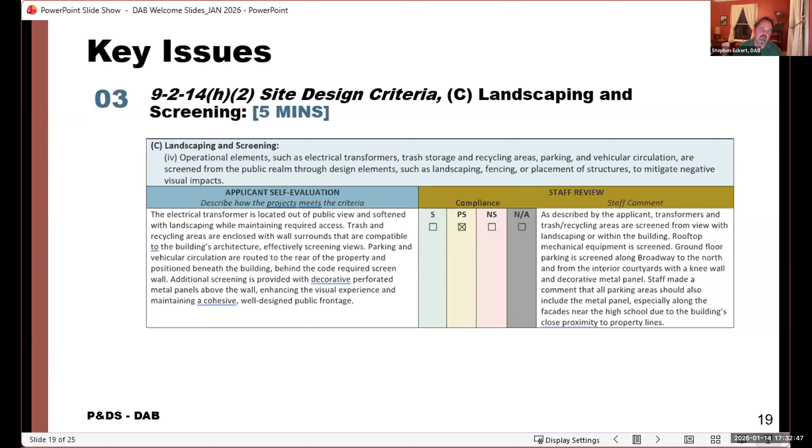Look, because you're showing, if you go to one of those views, you're showing wrapping the columns with block. Is that what you're showing? In some ways, following the building to the north where you have the round, big sonotube columns, they're sort of integrated. I don't know, somewhere where you can see the square columns that you have in the parking area, there was like another view.

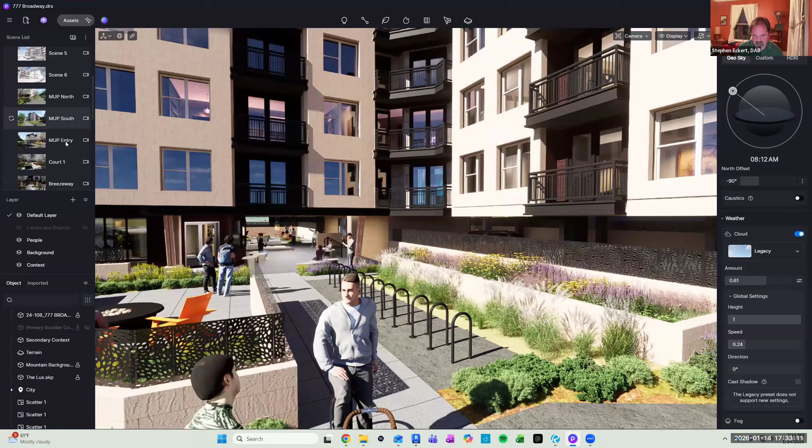The problem here is you have that offset, right? So it's tricky to integrate it. Yeah, but it could be simple, I don't think you want to get too fussy.

If I was looking at this, I'd say, I don't want you to come out of this meeting thinking 'oh God, these guys are all a-holes, now what do we do?' But that ship has sailed, first Stephen.

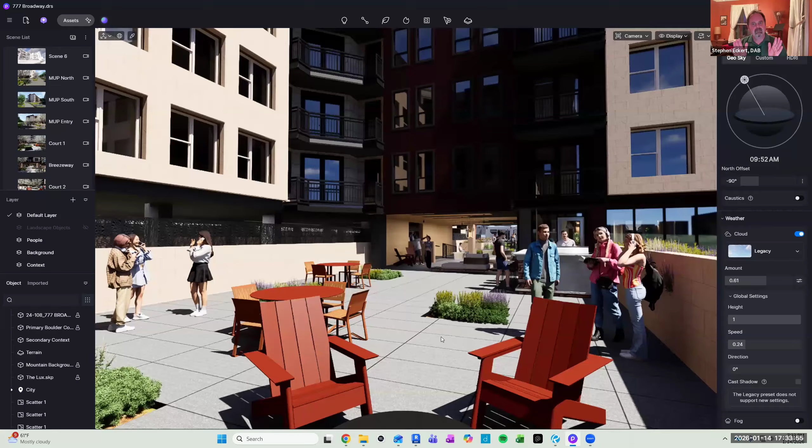The first step, can we just go simple? I actually appreciate the back of this building because it's a lot more simple and straightforward. It's not trying to solve all these problems, does that make sense? And the same with this kind of thing - what's a simple solution rather than adding layers and layers of complication. I think that will help it.

Okay, so I would say that in conclusion, we like the recommendation of the addition of the screening on the south facade that is currently missing. And then if there's a simple and elegant way of integrating the facade of that parking in certain areas, and not necessarily the same way all the way across the parking garage, kind of the way that it's being addressed right now - but if there's a way and opportunities to integrate it vertically into the design, that would be encouraged.

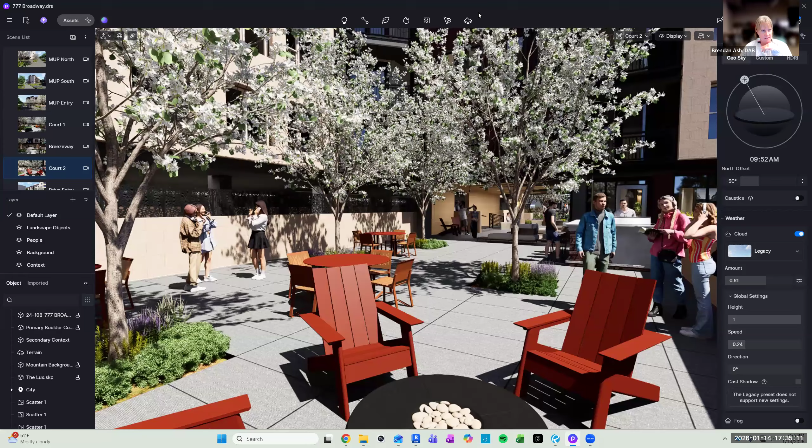Okay, so now I think we can go to the height modification conversation. Because this is a large floor plate exceeding 120 feet along a public street, they have to meet two of the following design criteria: type of dominant color, material or color, scale or orientation of that material, facade recessions and projections, locations of entrance and window placements, roof forms, and building height.

Again, as I stated before, I don't think it's really within our right or purview to say whether or not we think they should be granted the required height. I think we need to say realistically, do they meet two of those design requirements? And is there an opportunity to make some of these moves we've already discussed to minimize the massing or the feel of the overall design or the overall requested height?

Rory? Yeah, I opened up the whole review with this piece, so I'm happy we're revisiting it because this, to me, is by far the most important topic of tonight's discussion. Again, when I look at the criteria A through E, they want you to essentially take a building that is this long. If you're asking to make it taller than the code would allow by right, they want you to break it into more digestible forms.

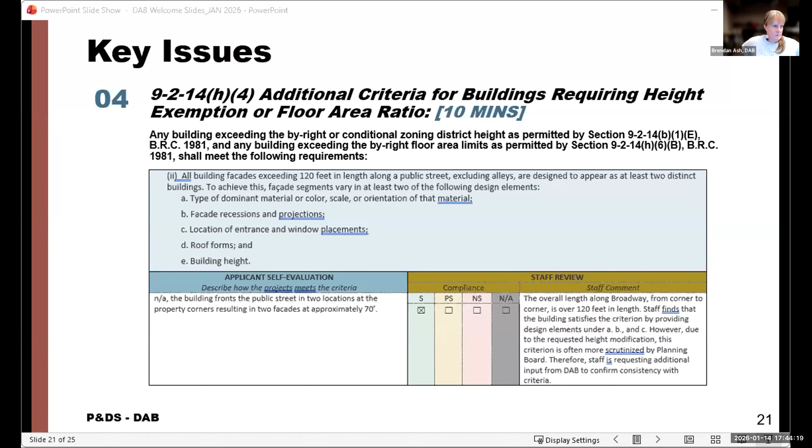Okay, so in conclusion, and I think this was a good one to kind of wrap up our overall discussion about massing in general.

I think it sounds like the board would agree that there is opportunity for additional height step downs, not necessarily keeping all the height at the end caps where the stair towers are, where you're going to need all that height. Creating or providing an opportunity to have the ends step down and not read quite as uniform a mass of building, where some program on the fifth floor is reduced or eliminated in order for some of the height to be more centralized in the project.

Stephen, you said that in one of the first comments, and then some of that height is given the opportunity to erode a little bit and fall as you go to the ends of the end caps, or the ends of the wings. That might require a study or relocation of the stair towers, because that keeps coming up in this conversation.